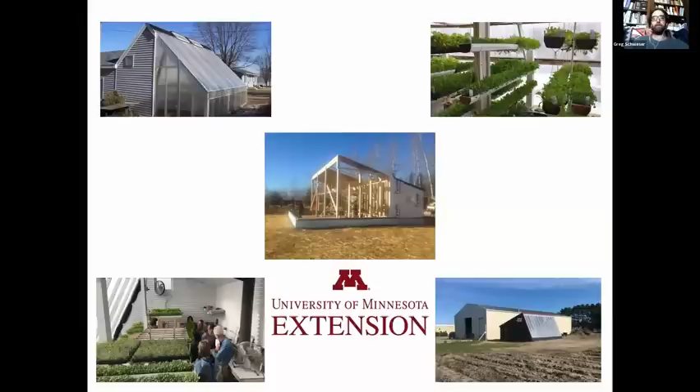I am Greg Schweser. I'm with the University of Minnesota's Regional Sustainable Development Partnerships. We are a program at the University of Minnesota Extension. What we do is we connect innovators who are farmers or community groups or just individuals in the communities. We connect those groups with the University of Minnesota and the university's resources.

So we help people working on sustainable development ideas that are homegrown, homespun, around the areas of clean energy, natural resources, sustainable communities and tourism, and sustainable agriculture. So over the past few years, we've been working on this Deep Winter Greenhouse Initiative, which started about 10 or 15 years ago now with Carol Ford and Chuck Waibel when they built their first greenhouse, which you see in the upper left corner here.

They built their first deep winter passive solar greenhouse and published the Northland Winter Greenhouse Manual with help from the regional partnerships. And they connected with us to help spread the word and do workshops and develop this Deep Winter Producers Association. From there, this work has spun off and we've ended up developing publicly available deep winter greenhouse blueprints with advanced versions of this concept.

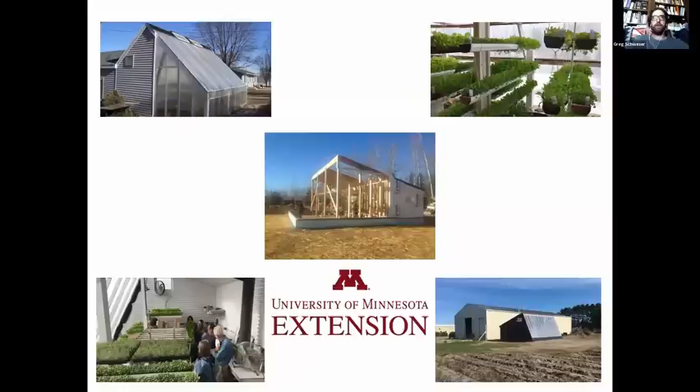And we continue to work on it now with a new, larger farm scale deep winter greenhouse. And we've done horticultural research and all sorts of workshops and outreach. So this work just keeps continuing to go on. And it's been great. And we also do this around all sorts of other issues, food related, clean energy related, natural resources and other.

And today we'll be featuring Dan Handeen. Dan Handeen is a research fellow at the Center for Sustainable Building Research with expertise in passive solar design, net zero and high performance residential construction, building science, community design assistance, exhibit design, and materials life cycle analysis. He holds a Master of Architecture from the University of Minnesota and a permaculture design certificate and teaches in the architectural program at the U of M.

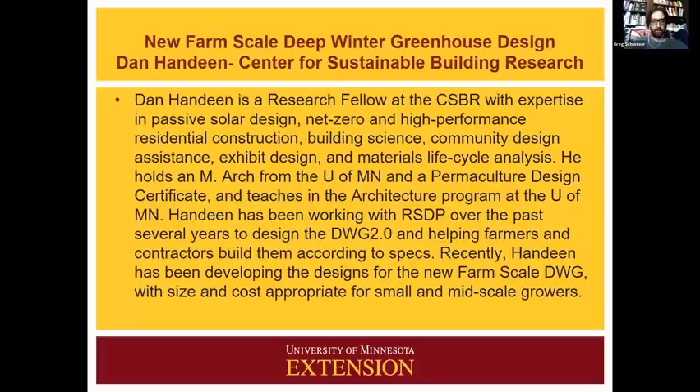Handeen has been working with the regional partnerships over the past several years to design the Deep Winter Greenhouse 2.0 version and has helped farmers and contractors build these according to the specs. Recently, Handeen has been developing the designs for the new farm scale Deep Winter Greenhouse, which is size and cost appropriate for small and mid-scale growers.

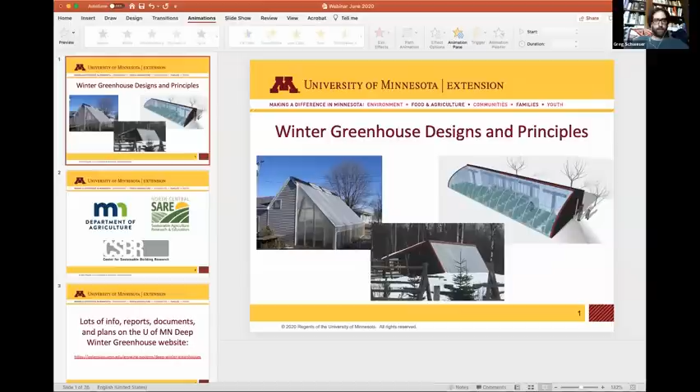All right. So, are you seeing my presentation or my presenter mode, Greg? I see your presenter mode. Okay. There you go. How's that? That is great. All right.

So I've taken the liberty of renaming this webinar a little bit, in that I really want to cover a lot of the principles. I know a lot of you are joining us because you have more general questions about designing your own winter greenhouse. And I know that there are many, many different ways to approach winter growing. And so I really want to try and set you guys up for success in whatever particular type of route you choose to take as you try and grow stuff in the winter.

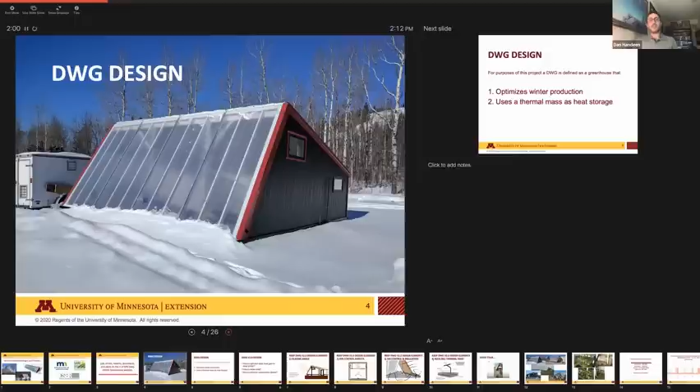So I wanted to talk about deep winter greenhouse design first, generally. Before we get into this, I just want to be perfectly clear that we're not saying that this is the only way you can grow in the wintertime. And I look at the deep winter greenhouse as we define it at the U of M as sitting along a whole spectrum of what we call,

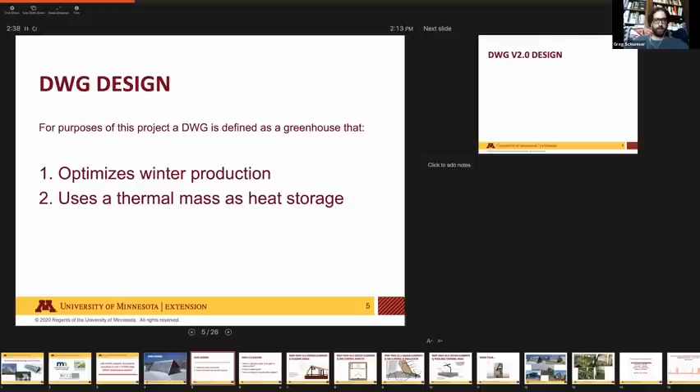I want to be clear that it's a spectrum of what we call CEA, or controlled environment agriculture, right? We're manipulating the environment somehow so that we can create conditions conducive to growing what we're trying to grow. So that could be everything from low tunnels, just Reemay row cover over something grown in the ground, to maybe a cold frame, high tunnels, winter greenhouses, deep winter greenhouses somewhere in here, and then all the way to something like vertical farms where it's completely hydroponic and artificially lit. So all of these things are on a big spectrum, and we see this fitting in somewhere.

I like to also say that you can grow anything pretty much anywhere if you throw enough energy at it, right? And really our goal with the deep winter greenhouse work is to give precedent to passive solar design. So we're trying to capture as much of the sun's energy as we can and use that as our primary heat source. And then, as we'll see, you obviously have to have some backup, supplemental heating, also known as insurance. But we're taking basic passive solar design principles and utilizing that as far as we can to meet our primary energy loads, right?

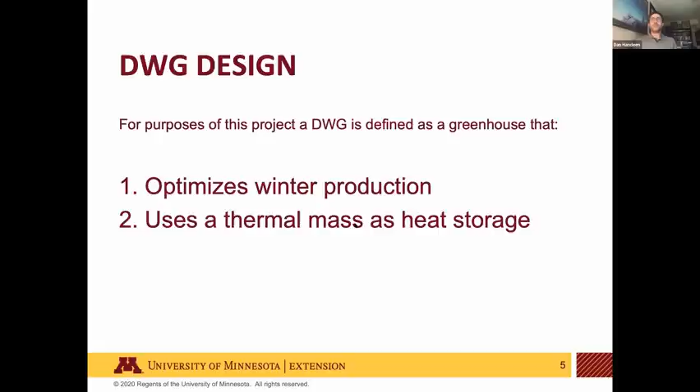So looking at the V 2.0 design, we like to say that the V1 was Carol and Chuck's greenhouse. Carol is on the call with us here. I was contacted by the regional partnerships to basically come up with a set of best principles and talk to designers, operators, consultants, and was really fortunate enough to travel around the country and talk to people who are doing this type of work, and come up with what we call the V 2.0 design.

And so as we were putting this together, a set of questions came up. How do we respond to these? One was, how do we optimize our solar heat gain? That is, how do we get as much of the sun's energy inside the building as possible during the wintertime? How do we retain that heat once it gets into the building, so that we're not losing it? It's one thing to capture it, but another thing for it to leave right away. And then lastly, how to improve construction details.

One consistent theme with the greenhouses that I visited was that the design was well thought out, and theoretically it would work very well, but there were details, particularly in corners or where different types of materials would meet, where there wasn't a fully anticipated way of how that was going to go together. And that became a draft or a leak or some kind of failure that ultimately really starts to harm the function of the greenhouse, which is keeping that heat in.

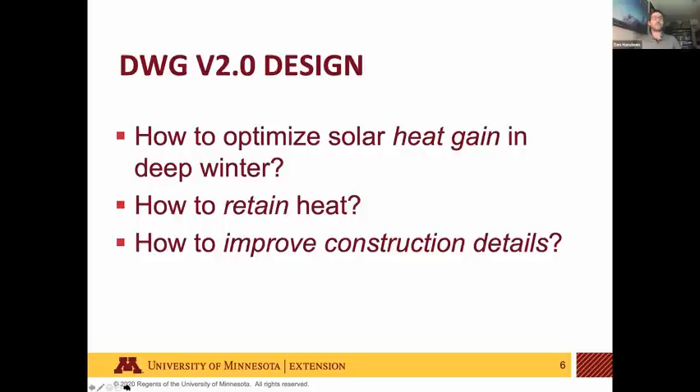So a couple of the defining features of the 2.0 design. One is the glazing angle. This is a section profile of the 2.0 design, and this portion here is the growing area. This portion up here we call the packing shed; I look at it as an airlock. We'll talk about that in just a second. But this is the glazing wall right here. This is angled at 60 degrees off of horizontal.

And the reason it's at 60 degrees is because it corresponds nicely not just to the winter solstice, when the sun is lowest in the sky, but also to January 21st, which in Minnesota is historically the coldest time of the year. So we're designing not only for the shortest photo period, but also when we're really trying to capture the sun's rays. We're trying to make this as perpendicular as possible because we get the best solar heat gain transfer.

I did see there was one question in the registration about modern glazing and that it allows light through. Yes, modern glazing, especially the frosted or diffuse ones, does a great job of letting the light portion of the spectrum in. But along with the light portion, we're also trying to get the heat portion of the sun's electromagnetic radiation into this building. So we're trying to make this as perpendicular to the sun's rays as possible during the wintertime.

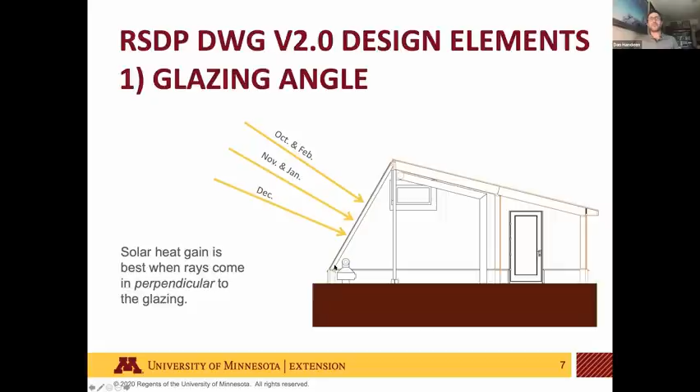The second defining feature was really about the air control aspects. This is manifested in two different ways in the 2.0 design. One is that we're trying to control the mass of air that we're containing in the growing area, particularly because we've worked really hard. We built this crazy structure to try and get all the heat in there. We want to make sure that it stays inside. We're minimizing any drafts and really trying to be careful about humidity control, actually.

One of the ways that we do that is by putting the packing shed area, as we call it, on the northern side of the greenhouse. Again, this is our growing area. This is a plan of the greenhouse. And so we've got doors to the exterior here.

This is the only door that actually leads directly into the growing area. And so this is acting as an airlock or a lobby, if you will, right? So that we don't have actual airflow that's going directly in and out of the greenhouse just when we're walking in and out. This also becomes a nice area that has some conditioning. It's not outdoor conditions, so it's a great place to store things like soil mix or fertilizer or whatever you're working with in the greenhouse that isn't actually taking up space in the growing area, right?

We really want to try and maximize our utility of this area because, frankly, it's relatively small. And secondarily, we've put a lot of work into it, right? To make this a very particular growing environment. And so we want to be able to utilize it as much as possible.

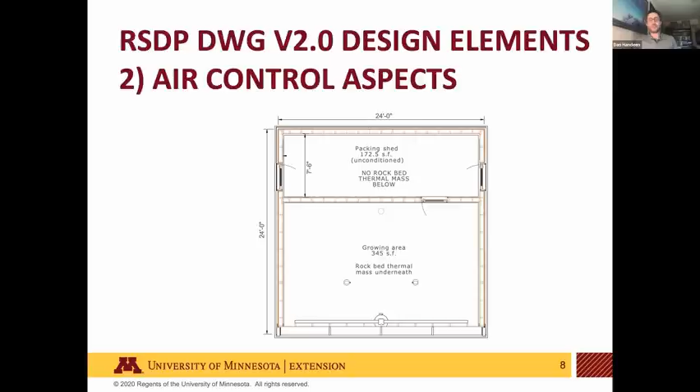So looking further, the enclosure, again, the ways that we're trying to keep the heat in once we've got it into our greenhouse here. We've got R23 rock wool insulation or mineral wool insulation. They're synonymous. This is exceeding Minnesota residential code amounts. We've got about R30 in the roof.

We also have vapor control. This is very similar to the vapor barrier in typical residential construction, trying to make sure that we don't get hot, humid air from inside the greenhouse migrating into the wall cavity and then meeting a dew point somewhere in the cavity and condensing out, right? We want to be very careful about where we are keeping our vapor.

This is a hot, humid environment. This is a growing environment. We know there's going to be moisture. We know there's going to be humidity. And because there's pretty wide fluctuations in the temperature, it's going to get hot, so that humidity is going to be mobilized. We expect that it's going to happen. We just want to be careful about where it happens. And so we want to make sure that it's not having the chance to move into the wall.

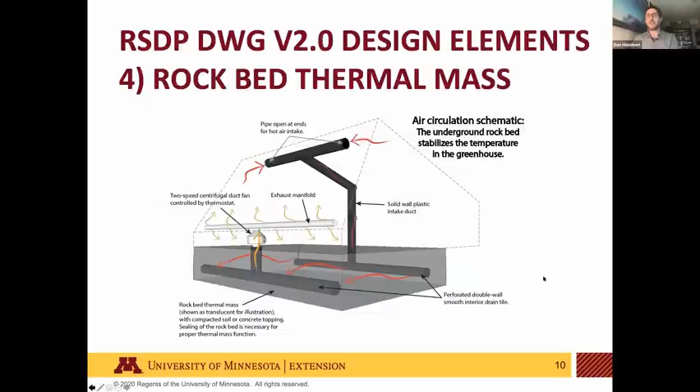We can put it on the inside and we could fill it up with a rock bed and that would still be effective, but then only our rock bed would be our thermal mass, right? This way we also get to use that concrete that's already on the inside of our thermal envelope, on the inside of the insulation, as part of our thermal stabilization, right?

We get to use it as thermal mass, so that's why we have it on the exterior. Why not closed cell spray foam that acts as a vapor barrier? Go for it. The reason that we've specified mineral wool in the cavity is because of environmental impact. Polyurethane spray foam has pretty high global warming potential, depending on the blowing agents that are used. So really from an environmental perspective, we opted to go with mineral wool insulation for this particular design. But if you have no qualms about it and you can afford it, it's also usually got a pretty decent price point. There's no reason why it couldn't be used.

How do you keep dirt, etc., from filling the spaces between the rocks below the greenhouse? Good question. Essentially, you have a layer of landscape fabric that goes over the top of the rock bed, and then some kind of compacted layer on top of that, right? So it's preventing any migration of fines down that would otherwise clog up the matrix in between the particles.

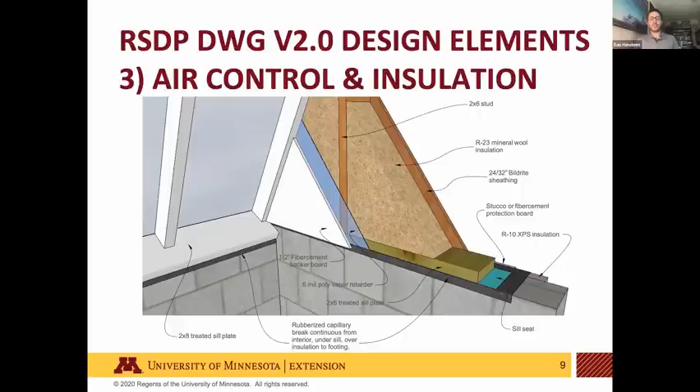Okay, I'm going to continue on with the presentation here. I'm going to turn it over to Greg quickly because he's going to share the video. So this is a little tour. Like I said on Wednesday, ideally I would have been able to have my cell phone in one of the greenhouses to show you inside and all of the different aspects of it. But because of COVID, we're not able to do that. So we've got basically a virtual tour. There will be some redundancy with what I've just spoken about, but it will get you inside so you can see what it looks like inside the V2.0 greenhouses.

So I will stop sharing. Okay, you got it, cool. Greg, I'm not hearing anything. I think it may actually listen to the speaker from your computer. Yep, I forgot to hit the buttons there. Let me try again.

All right, how's this?

I'm up at the Deep Winter Greenhouse at the Bemidji Community Food Shelf in Bemidji, Minnesota. This is one of the 5 following the prototype design, the DWG V2.0 design that was built through the Extension Service, the Regional Sustainable Development Partnerships of the University of Minnesota. And I'm going to do a quick walkthrough.

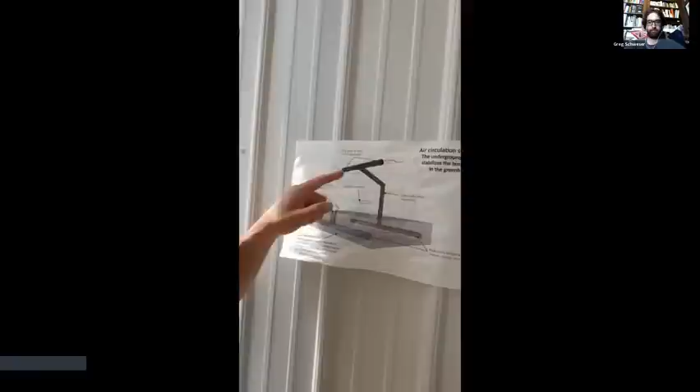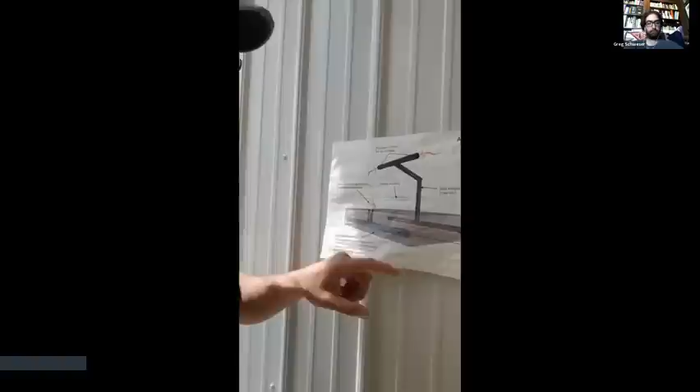Essentially the hot air goes in here, comes down here, and then it's distributed in a horizontal plenum. This is perforated, and then the hot air makes its way through this 4 foot thick rock bed. That air then exits the rock bed. Basically, a sealed duct comes out here at the base of the glazing wall. It's all drawn through.

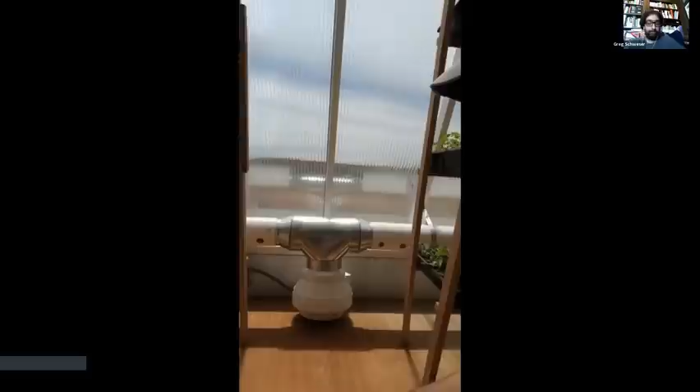It's sucked through from up there, from the ducts all the way down through the rock bed by this single fan. This is an inline, essentially an 8-inch radon fan. And then it's exhausted out into this horizontal plenum at the base of the glazing wall, basically just recirculating the air through the growing area and then down again through the rock bed.

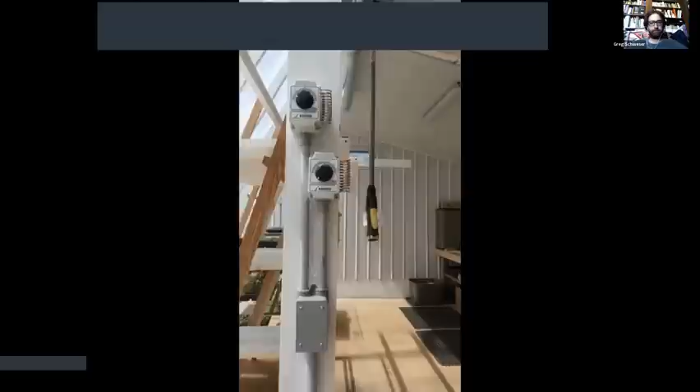The fan is controlled by a couple of thermostats. Ideally, we've got one set for the cold temperatures, essentially the times when it would be extracting heat from the rock bed and reintroducing it into the growing area. And that would be set for, I don't know, maybe 40 degrees, something like that.

And then the other end is when you'd be charging up the rock bed, and so setting that to something like maybe 65 or 70 degrees. So that's when you have the fan on to suck the hot air out of the growing area, and you're injecting that heat into the rock bed underneath.

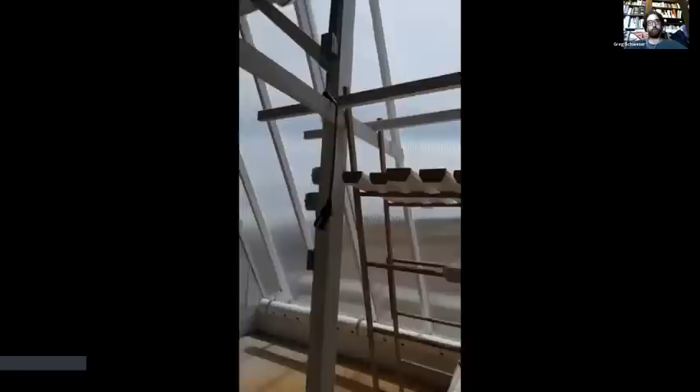There's ventilation windows on both ends. These are currently just manually operated, crank out casement type. They're regular vinyl frame double pane windows. Basically the reason those were chosen was for tight air sealing. We're trying to basically control any drafts that would be happening in here.

Having a little bit of issue with freezing during the really cold times and when we've got excess moisture in the air, but still working on how to address that issue. We've got our backup heater here. This is essentially a 2-stage electric resistance garage heater, more or less, and this is our backup heating. Again, this is our insurance. It only takes one time to freeze everything out. So in case that should happen after a couple really cloudy days or a really cold snap, then that can provide backup heating.

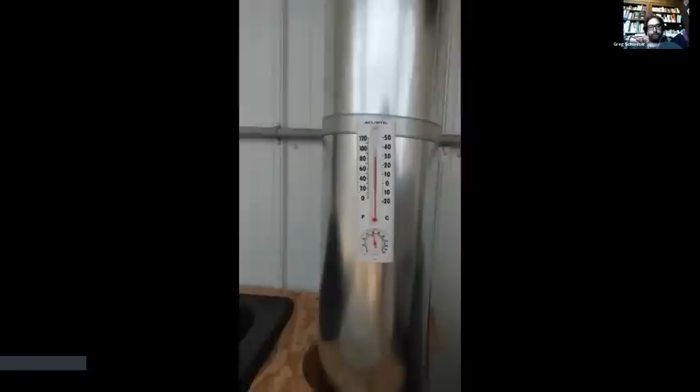What else? Temperature in here currently is, I don't know if you can see, about 82 degrees on the surface of the metal intake duct, and it's about 82 degrees in the regular growing area too. It's about 65 degrees outside right now up here in Bemidji, but nice sunny day. We've got the ventilation windows open too, so that might be affecting the temperature a little bit.

As far as what's growing in here right now, they've got some starts and some greens going. They're working on different configurations of planter setups, and so they're just getting into really how to utilize this space. They had some personnel turnover this past winter, so they actually weren't optimizing the operation just because they didn't have enough people to run it. So we'll see what happens this coming winter.

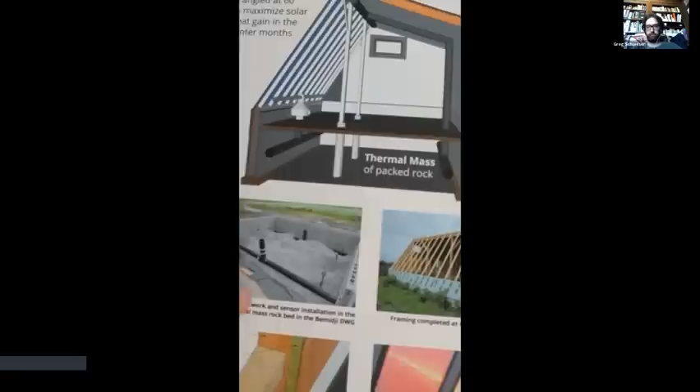Also, with this particular greenhouse, we've got a monitoring system set up, partnering with the U of M's Solar Energy Lab through the Mechanical Engineering Department. We have set up an array of thermocouples measuring the temperature within the rock bed. This consists of 45 different thermocouples arrayed within the rock bed. I've got a little photo right here showing the filling of the rock bed. Here we've got the horizontal plenum, and then there's 9 columns, 9 stakes, and those each have 5 different thermocouples mounted onto them.

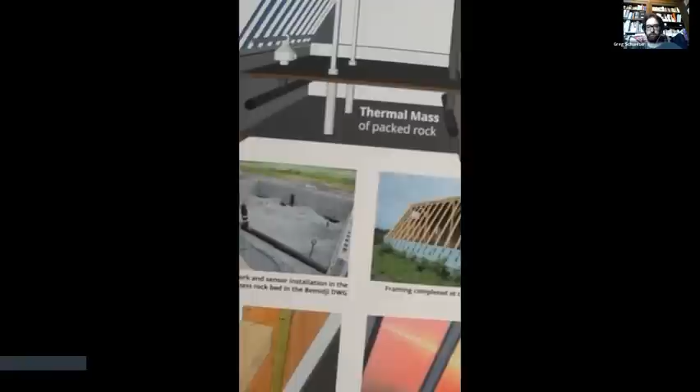All of the wires from the thermocouples come up through a tube at the back of the greenhouse, and that is all attached to a data acquisition computer, which when in operation should be logging the temperatures throughout the rock bed at, I think, a 5-minute interval. Also, we're measuring the temperature in the intake of the duct and airflow through the duct, so we know exactly how much air is moving through the system.

We are still waiting on definitive results from that, unfortunately. So please stay tuned for more results on what the temperature profile looks like within the rock bed, and that will lead us to some other ideas about how to optimize the size and configuration of the rock bed itself.

One thing that was mentioned on the Facebook page was that this greenhouse was in stealth mode, and that was because they had some glare issues. The sunlight was bouncing off the glazing wall and disturbing some of the neighbors to the south. So they had a shade cloth installed over the exterior surface of the glazing for a while. That's what the wooden strips are on the exterior of the glazing, and they have since put up another fence to the south, which blocks any reflective glare that would disturb the neighbors.

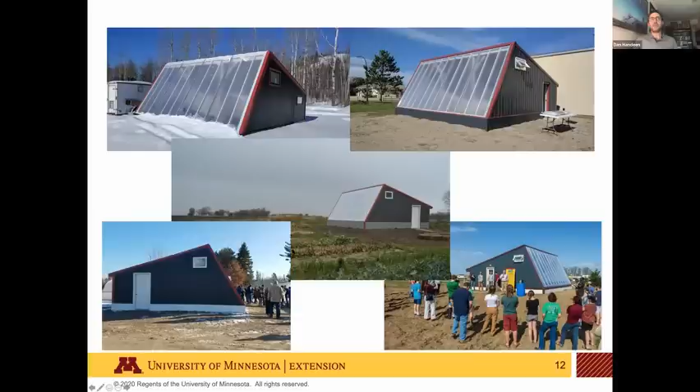And then other than that, a lot of what people are growing are more kind of quick churn, fast cycled salad greens. And Carol can talk at length about all this, that we've done some horticultural research in partnership with the horticulture department here at the U, looking at what specific varieties do best in this type of environment, and also testing growing media. And we're also doing some testing of optimizing light within the greenhouse in these short days, right?

So a quick glance into how it's working. Really, we haven't been able to get a good sense of how much energy the thermal bed has been able to store, but we are able to see how much backup energy we've needed. We did electrical monitoring at 2 locations with some decent results. And this one is for the one near Madelia, Minnesota. November, almost 500 kilowatt hours. December, 430. January, we lost the data signal for a while. Again, rural internet connections can be kind of tricky. February, 423 kilowatt hours.

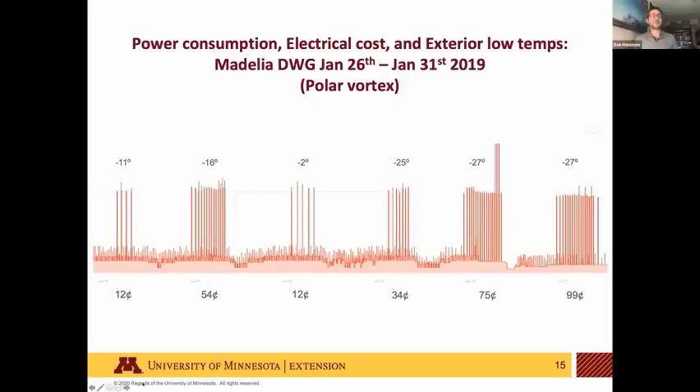And even on that super, super cold night here, 75 cents for the entire day worth of backup heat in electricity, and electricity being one of the more expensive energy sources. So generally, we're happy with how it's going. Some lessons learned.

Well, rely on your local builder expertise, right? The plans are pretty straightforward. They've been developed so that pretty much anybody with some decent construction familiarity should be able to assemble it. Material and labor prices vary very widely, and this was kind of one of the biggest surprises of building these 5 different greenhouses around the state.

Construction prices for the entire greenhouse ranged from, on the low end, 22,000 to the high end, 68,000, operating off the same set of construction documents. And so that reflected a couple things. One was how much labor they had to hire out, or that they could do themselves or volunteer build, and also material prices. The materials generally can be ordered from your local big box builder supply store.

But things like excavation, masonry, block work, foundation work, and actually the rocks for the rock bed varied quite drastically in price. The block work itself can be very expensive. These asterisk items here, these are things that we really tried to address with the farm scale winter greenhouse design, and I'll come back to that.

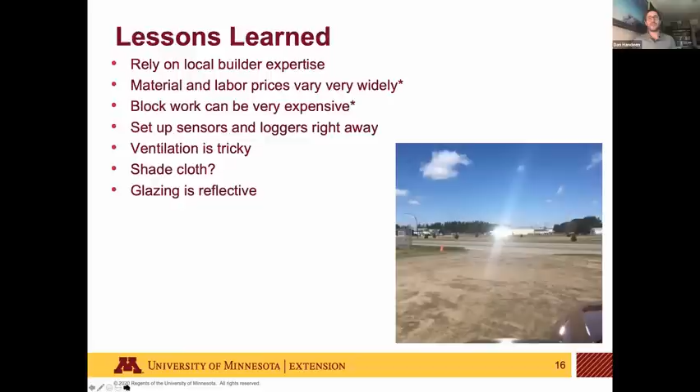So onto the farm scale winter greenhouse. I look at the V2.0 design as a very goal-oriented design, right? We had a set of parameters that we were trying to achieve that was minimizing our backup energy use, so prioritizing passive solar design and really optimizing for a November to March production window. So it has a very specific set of performance parameters that we're going for.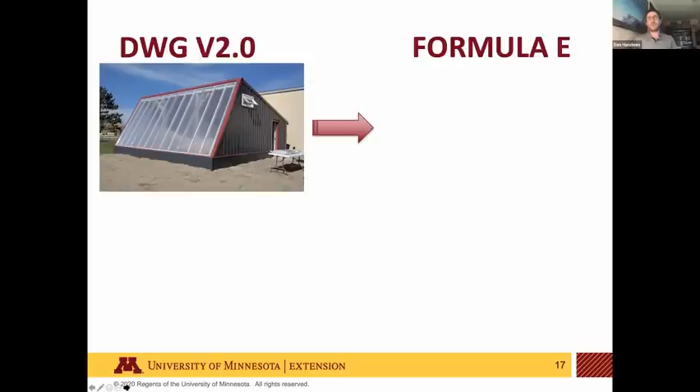So I liken it to something like the Formula E. This is the electric car version of the Formula One race. And so this is an all-electric car.

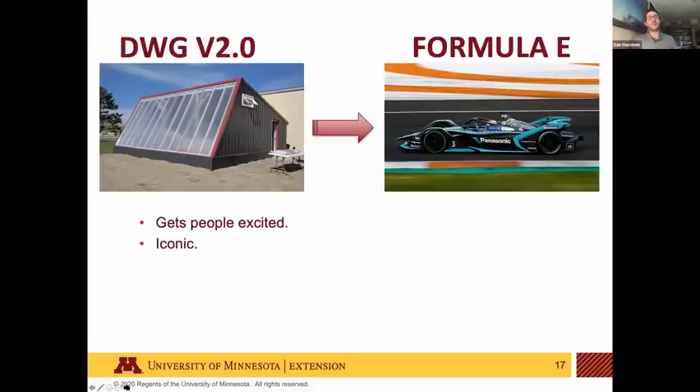Some other analogies, gets people excited. It's iconic. It's got a very specific form, recognizable as a V2.0. It is high performance under a narrow range of conditions, right? So it's not designed to go year round necessarily.

We are finding that it works better than anticipated, partially because the steep glazing angle also helps reject heat when the sun gets higher in the sky. And the thermal mass actually winds up being a temperature stabilizer when it's overheating in there. So we're actually able to cool off the air that's inside and help maintain the temperatures in the growing area.

It's highly responsive, but you do need to learn how to operate it correctly, right? We've created a very specific microclimate. It's not like growing in the field. It's not like growing in a hoop house. It's different and has its own set of parameters. It's not easily adaptable. Again, if you do make changes to this, it will affect portions of the performance, right?

And that's not to say that it's not going to work, but really, this has been a coalescence of different design approaches to try and optimize all of it. And it was expensive, as we found out. And that wound up being one of the single biggest responses to our work on this, is like, how can we make this more accessible to people that are interested?

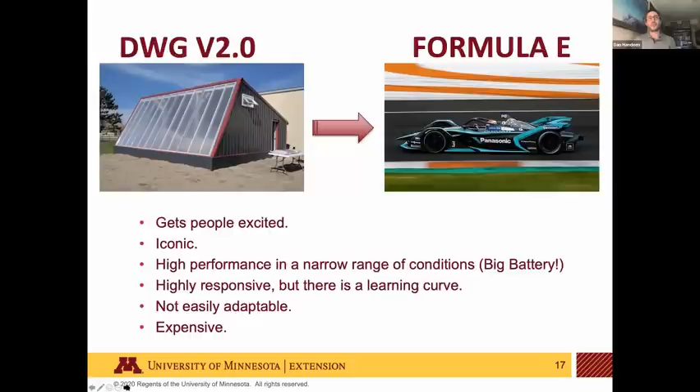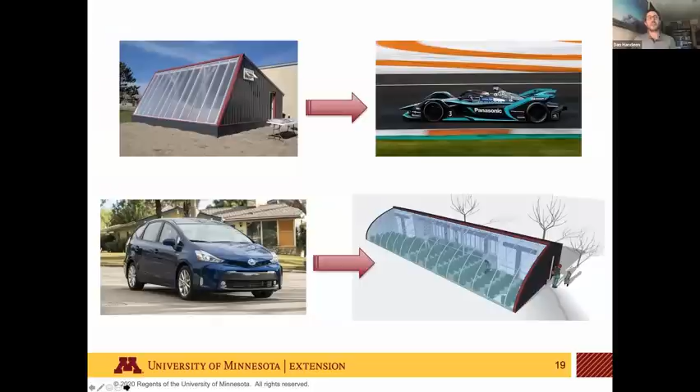And a lot of people were looking for a lower price point, lower capital expense to get going. So maybe everybody doesn't need a Formula E racer. Maybe they're more comfortable with something like a Prius wagon, something like the farm scale winter greenhouse. And so this is a rendering of what it looks like on the outside.

Major features of this: one is increased size. The footprint of the 2.0 was 16 by 24. The footprint of the farm scale greenhouse is 20 by 60. So almost 3 times bigger. It's reduced cost, construction cost per square foot. The average construction cost per square foot for the 2.0 was about $75 a square foot. And for this one, it's about $25 a square foot.

It uses a more robust wall for the opaque insulated walls on the east, west, north sides and the roof. So we're moving away from a cavity wall, moving away from the mineral wool, and moving to an entirely exterior insulated system. So from a building science perspective, this is a variation on what's called the perfect wall, where you've got all of your structure inside where it stays warm and it's controlled.

Then you have all of your control layers. This is your weather resistant barrier, your vapor barrier, your air barrier, then your insulation, and then any cladding in a rain screen type of application on the outside. And I can dig into all that stuff more deeply if you want. We're also working with a pre-engineered glazing wall.

So I look at this as kind of a hybrid assembly, where the south side of the structure is essentially a hoop house and all the rest of it is an insulated box, essentially. So a cross between maybe a cooler and a hoop house. I look at this as more of a modular type of structure than the 2.0. The farm scale, I see the top portion, the above grade portion, as more of a shell, and that can be moved around.

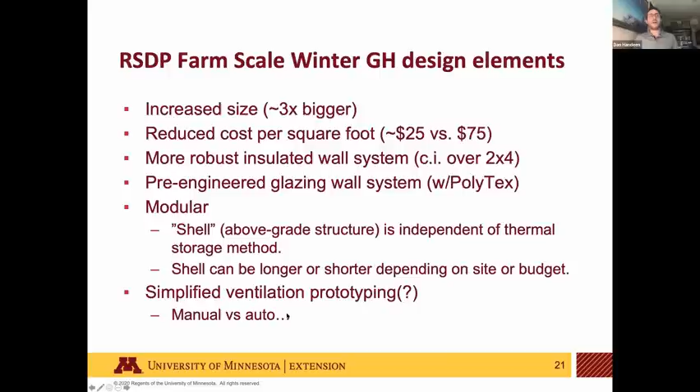This is a double glazed polycarbonate rigid glazing over that typical hoop house style truss and unistrut system. The roof is 2x8 rafters with sheathing, and then continuous insulation over the outside of that. And of course, insulated east and west walls.

People ask whether it's better to try and put glazing on the east and west sides. Really, from an energy standpoint, the amount of sun energy that you get in through glazing on the east and west sides is less than the amount of energy that you lose when the sun isn't shining. So ultimately, the east and west sides become an energy liability, right? They're a net negative on the east and west sides.

And so I generally encourage people to insulate their east and west sides and really optimize their south side if they're trying for, you know, true winter production, right? Of course, if you want to extend the seasons, it may make more sense to try and have those either be partial or full glazing.

The other little side note to that is that it's probably more recommended to put additional glazing on the east side because, again, that's where you have the early morning sun coming in. You want to try and heat up the greenhouse as much as possible after the long, cold night, right? So you want to try and get that temperature back up as quickly as possible.

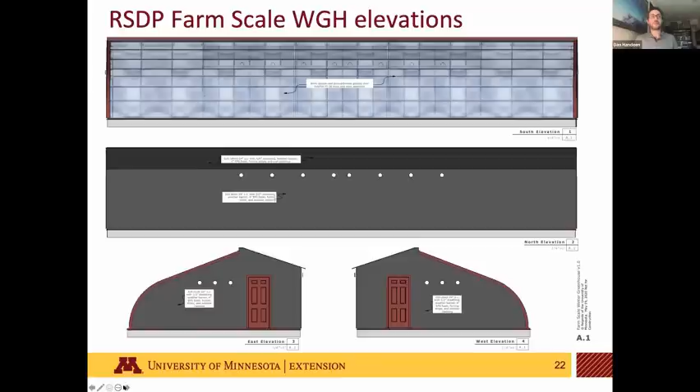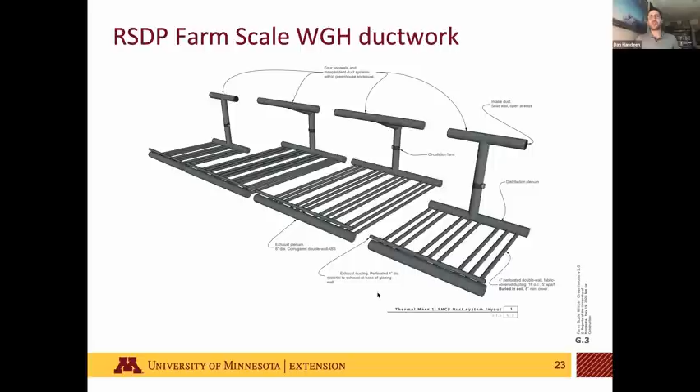The main reason that we're suggesting this is for cost and complexity, right? It's not convenient for everybody to dig out 2-4 feet of soil and then replace that all with rocks. That would be a fairly expensive endeavor. So depending on, again, what your goals are and your budget and availability to work with those more complex systems, you can make different decisions regarding that.

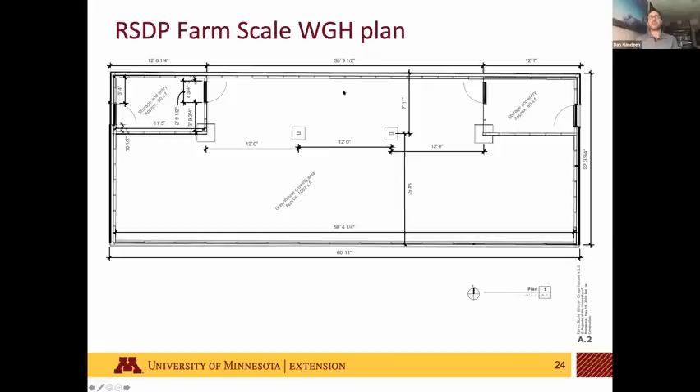So I want to point out that there's a number of different variations. Again, the shell is kind of an independent setup, and for what you do below grade, there's a number of different alternatives that you could undertake depending on how deep you want to excavate, how extensive a foundation you want to put in, et cetera. So this particular variation shows a helical pile type of foundation. These are also called ground screws. They're a big pipe that has a huge thread down at the bottom, and that thread acts like a big flange that helps act like a footing.

So it absorbs the gravitational load of the greenhouse, but almost more importantly, it's helping reduce uplift. You see miniature ones of these to help tie down portable tents and so forth. It's basically the same principle, only larger, for a building. These are often used to support decks and so forth. They are supposed to go down below the frost line, essentially. In this particular case, we've got those piles supporting a grade beam and the columns.

And then around the outside of that, we've got 4 inches of XPS insulation. So this could be simply trenched in. Dig a trench with a ditch witch or something like that, slip the insulation down. And as long as you've got that barrier, you're preventing the heat from moving out of your controlled, heated area in here and out into the surrounding soil, right? The other thing to note about this is that this insulation is continuous with the insulation that's above ground, right? Here we've got our 2x4 stud wall.

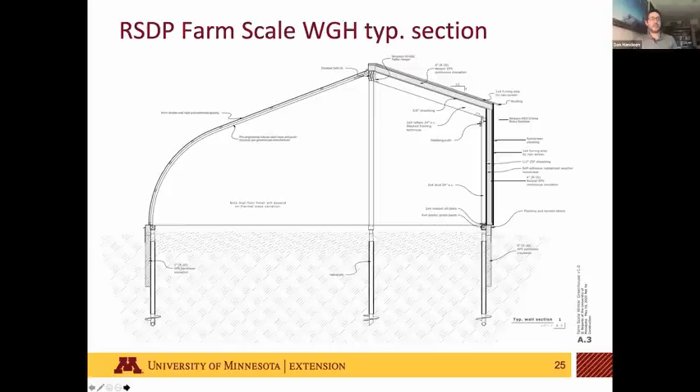Okay, quick question here, the farm scale version design will be available in about 2 weeks. Let's see, what time we got? 10 after 3. I will explain a quick variation, and then I'm going to go to the 3D model, which might help explain a couple more things. I think I will jump into some questions before I go to the 3D model, though, just to see if there's anything that needs to be addressed right away.

Here's a variation of what could happen below grade, right? We still essentially have the same shell above grade, but at the footing, instead of using the helical piles, you could conceivably use a block wall, just like we had on the 2.0. If you want to hire a mason or you want to do it yourself, you can put in a stem wall on a footing. Sure, work fine. In this case, we've got a grade beam.

And so this is a 4x4 plastic lumber. You often see this used in landscaping projects and retaining walls and that sort of thing. You could use treated lumber here if you wanted to. The reason I'm going away from treated lumber is that it doesn't actually never rot. It will rot just more slowly, but plastic is going to be there pretty much forever, right? So we don't have any danger of that rotting out over time. And if we had to move the greenhouse and reassemble it somewhere, we could potentially reuse those pieces.

Yeah, and also if you're looking for organic certification or something like that, there's cautions against or prohibitions against using treated lumber in the growing area. So that essentially becomes the footing for the greenhouse. This is typically secured with larger ground screws, right, that would go down and hold that footing in.

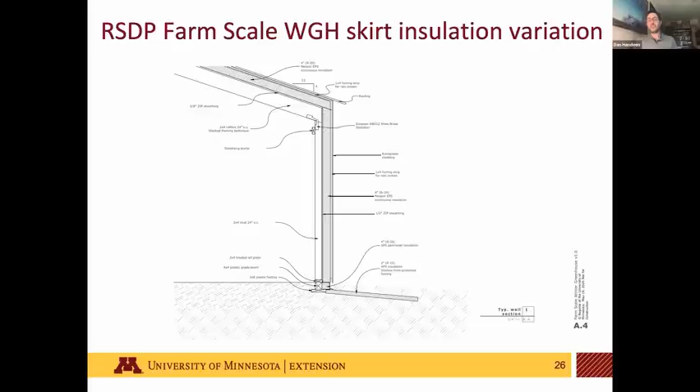All right, I am going to just take a quick break and answer some questions, and then we'll get to the 3D model, okay? So here's a good one. Since most heat is lost overnight, have you had anyone install a manual thermal wrap over the glazing at the end of the day? This also relates to another question I thought I saw, I think it was in the registration questions.

Does the structure utilize an energy curtain at night, or could one be retrofit? And so these are referring to a couple different strategies that we see in greenhouses. I'll answer the first one first. The energy curtain refers to, really, it's kind of a sheet of fabric that goes typically right over the plants in a typical greenhouse.

What that does is it lowers the amount of volume in the entire greenhouse. It reduces basically the air circulation that's happening in the greenhouse, and helps to reduce transmission or conduction through the outside walls of the greenhouse. That can help, but it's really more of a strategy that's used in typical gutter-connected style greenhouses, much larger operations that are already hemorrhaging massive amounts of heat through their glazing wall structure. So the energy curtain really helps cut down on their margin, right?

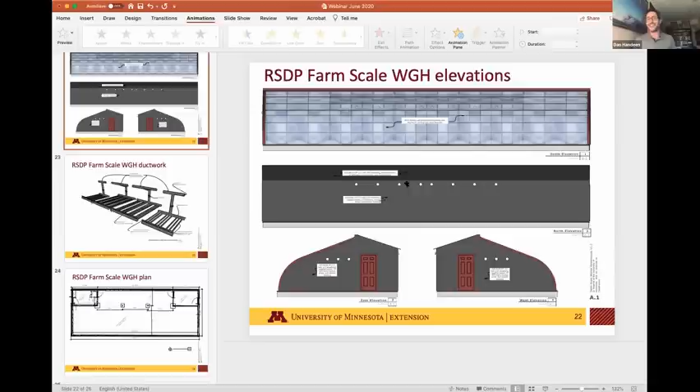So I'm looking at a way that can simplify the operation, is less vulnerable to frost or air leakage, and still is pretty operator friendly, right? I should also just say that we get a lot of questions about automation, and could you automate this, could you put some kind of controller on the ventilation system? And yes, you absolutely can, right?

The way that we have our ventilation set up in the 2.0 systems, those vinyl windows, is using what's called a Mega Vent. They're built by a Dutch company, and you've probably seen these for cold frames and so forth. It's a paraffin-filled cylinder, and as it heats up, that paraffin expands and extends this cartridge, which then actuates or opens the ventilation. It opens the window. As soon as that cools off, it contracts and it shuts the window.

So it's a nice, super low tech way. No electronics, no motors, no exterior sensors. You just dial this little cartridge, and it's super simple, right? My perspective on this is that the more complex of a set of systems you get together, the more places it can go wrong. So if you have a high degree of, I don't know, how do I say, delicacy?

If it's a very delicate system, if you're relying on this thing to talk to this thing in a very specific way, which then moves this actuator that is the entire backup control for your entire system, there's a lot of vulnerability there. And so what I'm trying to do is simplify the system as much as possible so that we don't see failures like that. So that's our approach to it. But it's always tricky. Yes, you can automate, absolutely. You can throw automation at it if you've got the patience and the budget and you like troubleshooting, that sort of thing.

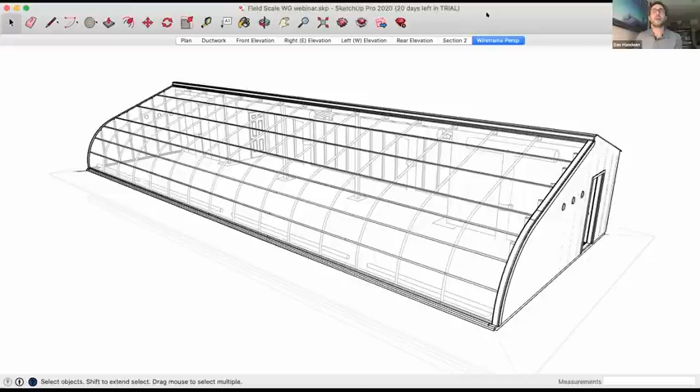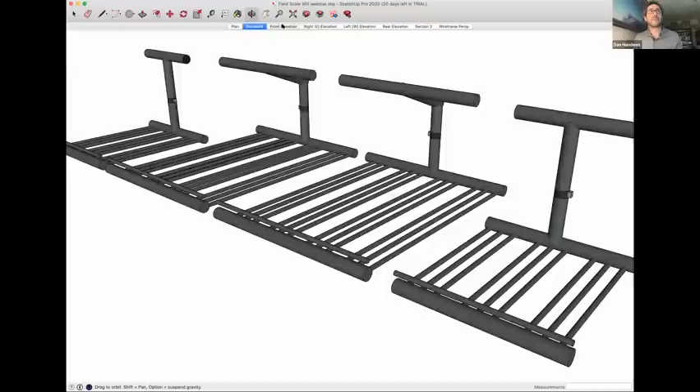All right. So this is the farm scale greenhouse in wireframe. And I can go through some of the features here. This is the plan. You've all seen this. The ductwork, essentially, how it would look inside the greenhouse, right? So you can see it laid out in here. From the front, from the rear.

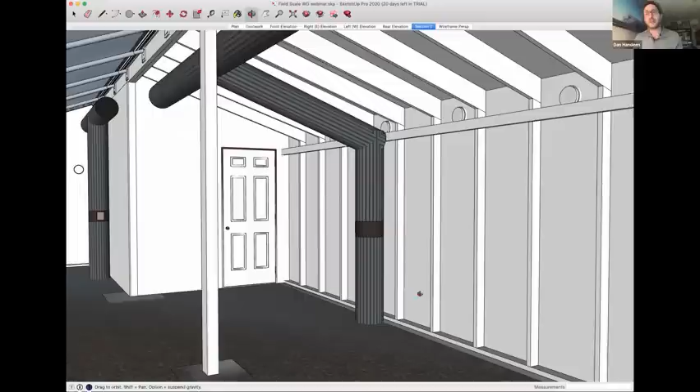But probably more interesting to most people is going to be the section and what this looks like. So I can dig into a couple things here. Importantly is the structure. You'll notice here's the 2x4 stud wall that is, again, there's no interior finish here. This is open to the inside so that it can dry out. It also is ambient temperature of whatever's in the greenhouse. So we don't have a temperature differential that that moisture would conceivably condense out onto, right?

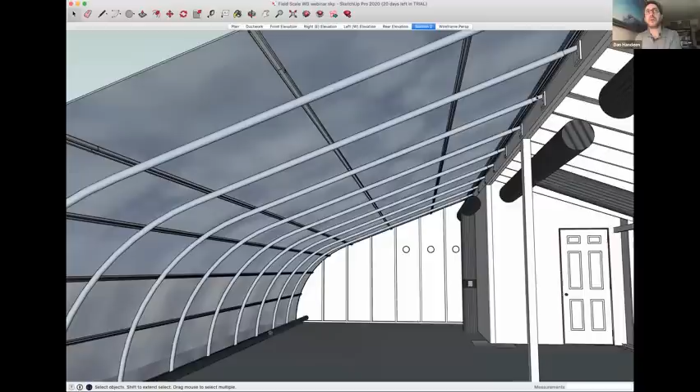On this side, we've got the glazing wall. There's a stud basically that gets screwed to the ridge beam up here that receives the top end of the truss, and there's another stud down here on top of the sill, pardon me, that receives the bottom end of the truss. Then these horizontal pieces, they're referred to as unistrut systems. These act as purlins, stabilize the whole thing, and that's what the glazing wall actually gets attached to.

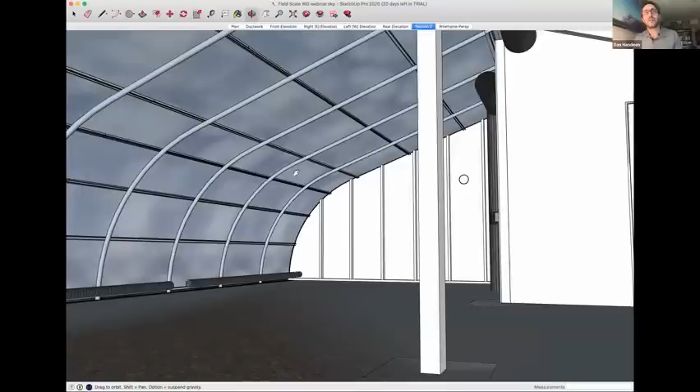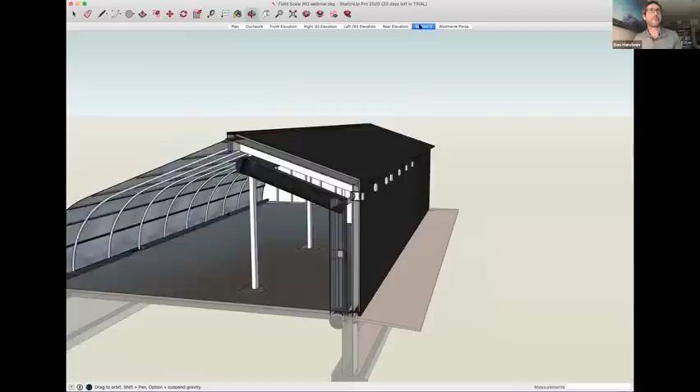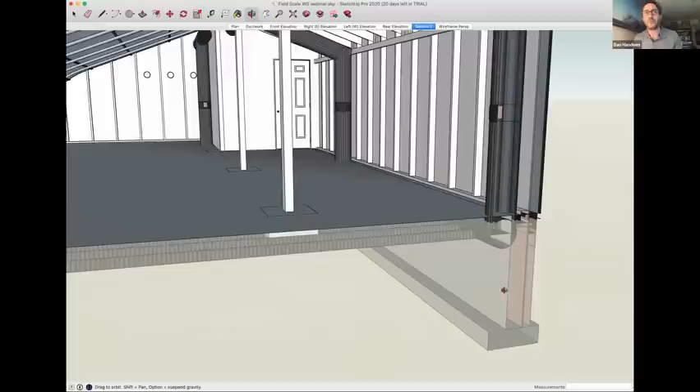Let's see. I think I can disassemble this a little bit here. Maybe better would be to go through some of the variations. I've got all of them turned on right now, so it's a little bit confusing, but this could be one variation, for example, right? And pardon me, it's doing a section cut through the outside line, so it looks like it's hollow, but you'll just have to imagine with me that here is your foundation wall.

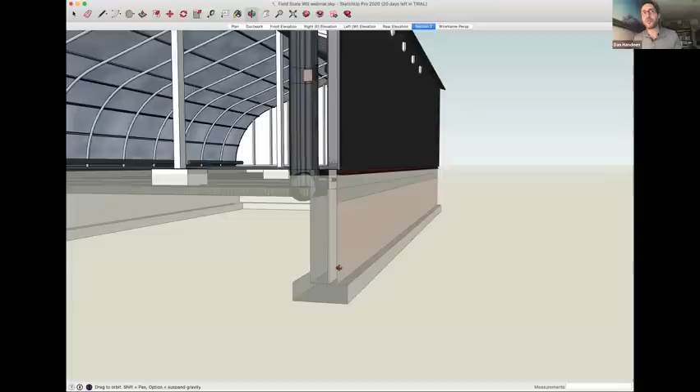Let's see if it lets me do this. Oh. Here's your foundation wall, here's your concrete block right here, and then on the outside of that is the vertical insulation. Again, this would be something if you're going for a more traditional build with a strip footing and a stem wall, depending on where you are.

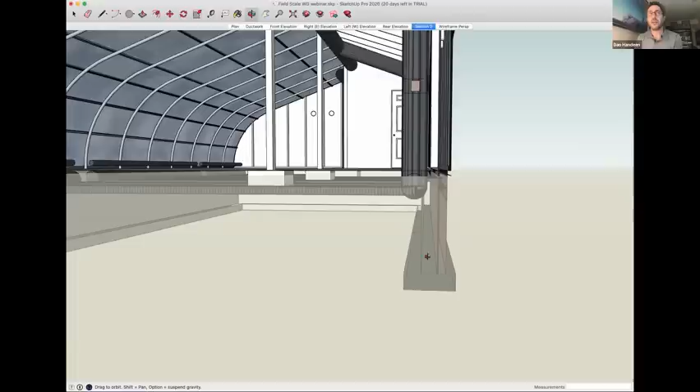Oh, and this brings me to a couple questions that have been asked already about codes and how the authority having jurisdiction, or the AHJ, would look at constructing these. So depending on where you are, you may have more or less enforcement of the codes. For example, in the city of Minneapolis, we were able to get a conditional use permit because we don't have a permanent foundation. We use that grade beam style foundation rather than a permanent footing and strip footing and stem wall type of approach here. But depending on where you are, you may need to go down deeper if you are putting in a permanent foundation.

Alternatively, if you, let's see here. Somewhere I have, sorry, something is pokey here. Come on. Well, maybe this isn't going to work.

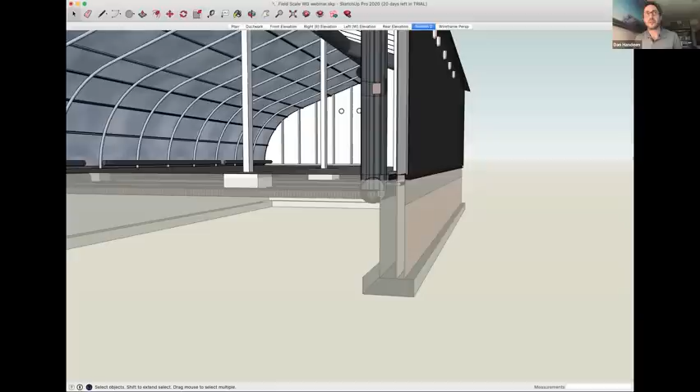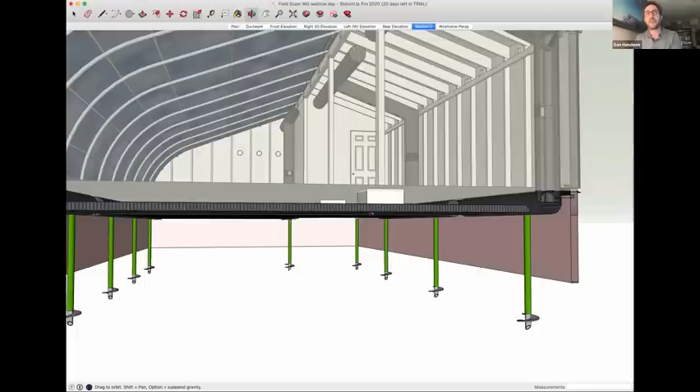That one? There. Okay. So alternatively, you could use the helical pile foundation instead. Again, these are arrayed to support the grade beam. You could put them underneath the columns if you wanted. In this case, there is a big concrete footing under each of these. But these go in, essentially it's like a bobcat with a fancy attachment on the top that just literally screws these down into the ground to the right depth. And so, you know, you do have to hire that out, but it's a pretty convenient alternative to excavation and then concrete footing and block wall or something like that.

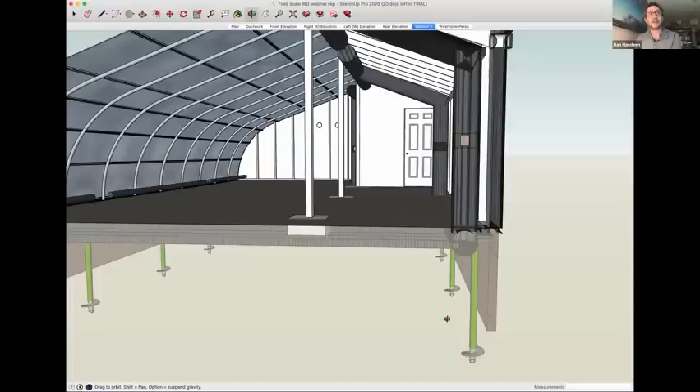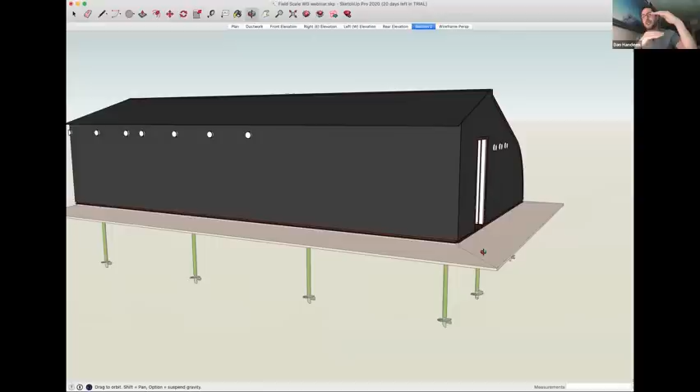And then alternatively, instead of going vertically with the insulation, we could go with something like that skirt insulation. Again, this is laid under the ground around the perimeter, right? So you basically just have about a 4-inch deep layer of soil on top of this surrounding skirt insulation, right?

So we can, ooh, my computer is acting pokey.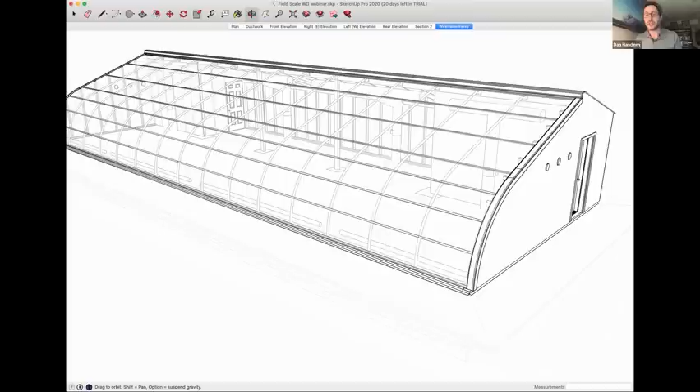All right, enough of that. I will try and hit some more questions. It's 3:42. All right, where are we?

Where to get plans for the 2.0 or 3.0? There's a link in the Q&A to the Deep Winter Greenhouse RSDP website. That is where all of this lies. The 3.0 plans, or sorry, we're referring to it as the field scale winter greenhouse. That's primarily because we're looking at being able to extend the production season for a while.

It's not going to have the same type of heat retention capability as the 2.0. Obviously, we don't have as much insulation. We've got more glazing wall, which again is going to lose more heat. And depending on what type of thermal mass system you use, we'll have a difference in how much heat we're able to store. But all of our reports, all of our research is available on the Deep Winter Greenhouse U of M site.